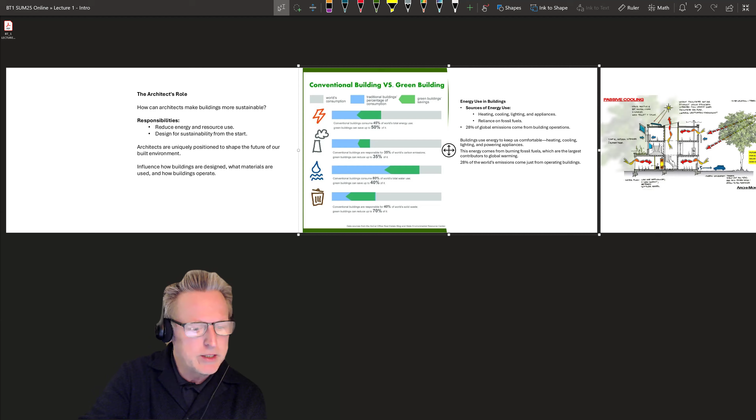With this final piece, we want to talk about some very basic steps that architects, interior architects, construction managers, and the whole building industry are taking to begin to remediate the CO2 output related to creating the built environment and making buildings more sustainable. I want to highlight that we're just brushing the surface of this topic. Next semester we'll go deeper into alternatives and additives instead of cement to create concrete, and we'll look at mass timber as a new construction material that didn't exist in any significant way 20 years ago. This is really just to introduce you to the idea that we are involved as an industry in CO2 output, that climate stability is important to our design, and that we have a role in mitigating our contribution to CO2 emissions and buildup.

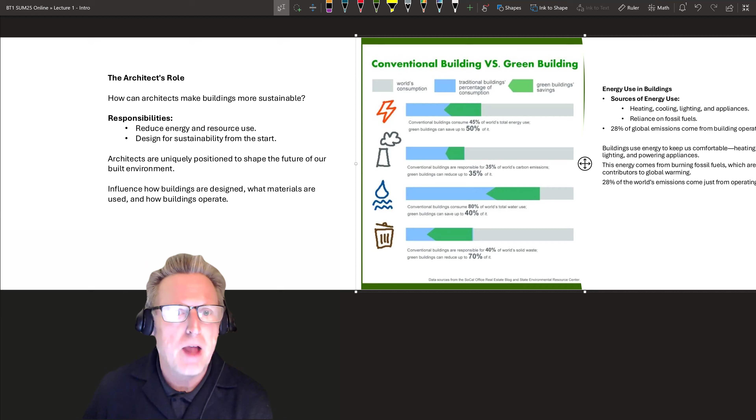And as usual, I have got my pen. I want to apologize if there are non-architects in the group here, since really I'm talking about the building industry at this point.

So what can the built industry do to make buildings more sustainable? There are really two responsibilities that we have taken on, and they're related, as a broad set of industries related to making the built environment.

First is simply to reduce the energy use and resource use of buildings. This can be done in very technical ways - special additives to concrete instead of cement, recycled steel, a whole host of different things. But that's mostly on the construction side.

But it really begins with the design process - the design of the building or its interiors has to be done in a way that thinks about sustainability, how it will use energy, how it will create comfortable interiors without significant active systems. Then as the design develops, what materials will you use to build it, what structural systems you'll use, and what mechanical and active systems will be needed to create that comfortable environment we want inside buildings.

As I mentioned in the last talk, the fact that the building industry contributes so significantly to CO2 carbon is also a remarkable opportunity for us to help the situation by reducing the amount of CO2 we produce as a series of industries. We're uniquely positioned to help shape the future in this regard, and we do that by influencing how buildings are designed, what materials are used, and how we operate buildings over their life.

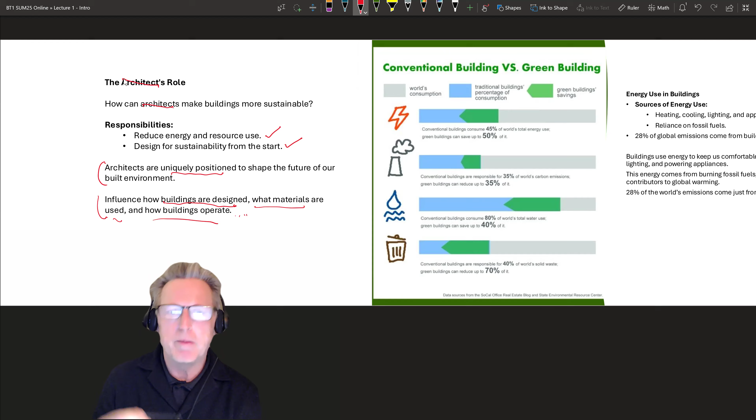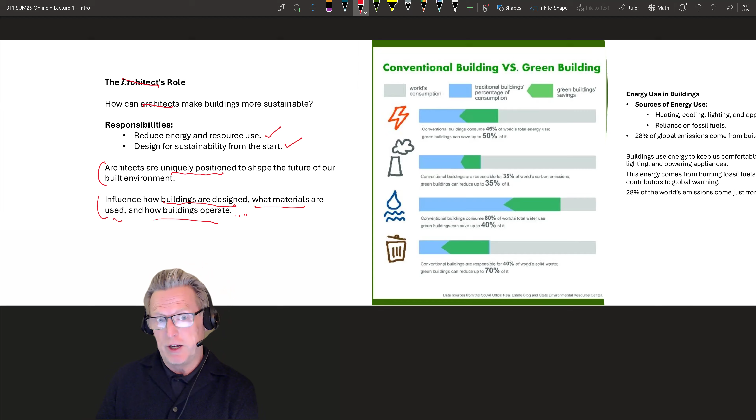I could add to that now how we reuse buildings, making sure they don't just end up in a landfill at the end of their useful life. If they can be reused, can we design them in a way to make sure they're reused, or that they can be disassembled so we can reuse the various pieces? Can we use materials that will endure, so that we can reuse them later?

If you simply look at conventional buildings versus what we call green buildings - sustainable buildings, net zero buildings, there's a whole slew of terms for it - you can begin to see that we can really reduce aspects of energy use, carbon emissions, water use, solid waste, all the problematic things about the built environment, simply by using particular design and construction strategies, nothing deeply innovative, that a conventional building would consume.

45% of the world's total energy. So we've kind of run through that, right? We can save up to 50% of that. And this is on a global scale we're talking about here.

We can reduce that by half if we were to implement sustainable strategies throughout the building industry and the built environment industries. That works its way down there. I won't go through each one of them.

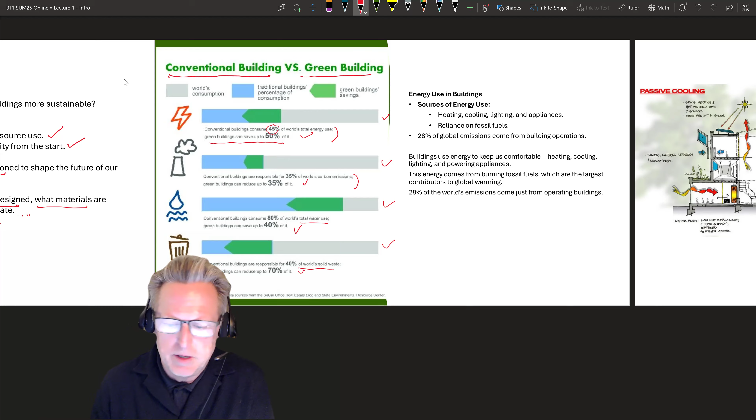So energy use, heating, cooling, lighting, appliances, equipment, all those types of things, we want to be conscious of that. Our reliance on fossil fuels, are there other alternative energy uses that are renewable? We've already kind of made that point earlier. Now this is just talking about building operations right now, not the construction of it, just the operations. So we're looking to cut that number down, is what it really comes down to.

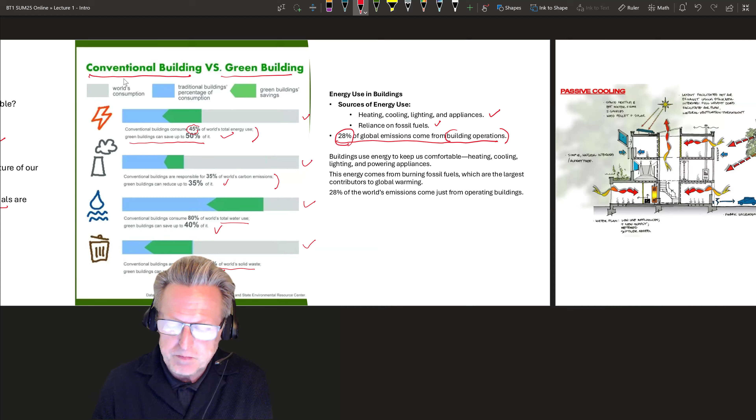I'm going to go through several large category strategies that we're using as industries, particularly on the design side, to address some of the issues we have. The first is passive design strategies: designing your building in a way that utilizes natural conditions of air movement, sunlight, and opportunities that plantings and trees give you for shade, to reduce the building's reliance on mechanical means, because mechanical means require energy.

The more we can create a comfortable interior without using energy from off-site, the more we reduce overall carbon input. Orient the building to maximize light if you're in a climatic zone where that's beneficial. The opposite would be the case if you're down in New Mexico, where you'd want to orient the building to reduce that, with small openings and thick walls.

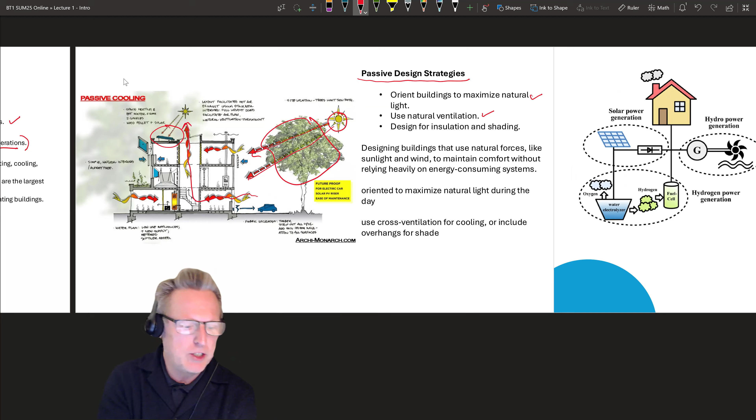But here you see other passive strategies, where you have a large deciduous tree blocking the sun. It will let sun in during the wintertime when it's colder and you want that solar gain. You see the air coming in, and as it warms, it moves up and escapes out in that direction, with a green roof starting there that creates extra insulation and a microclimate that helps cool things down.

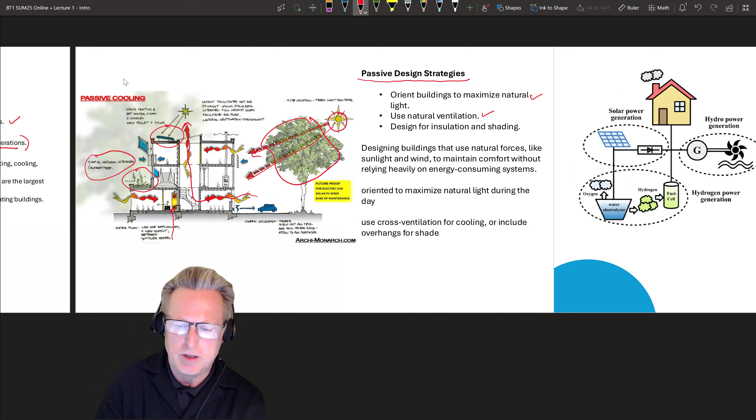There are other things noted here that aren't necessarily passive, like an energy efficient hot water heater and cooling system. The use of natural materials is another passive strategy as well. Those are some of the basic ones, but the key is passive design strategies, and you'll learn a lot more about them in Building Tech 3 and 4 and onward.

The next strategy is to use active systems, very energy efficient systems. We install mechanical systems, lighting, HVAC, all those types of things that don't consume as much energy as older technologies did. We also use renewable sources. Wind and sun are the primary types of renewable energy, and water can be renewable if it's recycled and reused.

But unlike wind and sun, water is not an infinite resource for us. There's only so much water on the planet, and only so much fresh, unsalted water. So that's something you have to work with internally and reuse water.

So we're looking to make buildings more energy efficient. They don't consume as much energy to do the same amount of work as before. LED lights are one of the main things. High performance insulation—you often see exterior walls getting thicker in a lot of areas because we need more insulation to meet the requirements of energy efficiency set by energy codes and things like that.

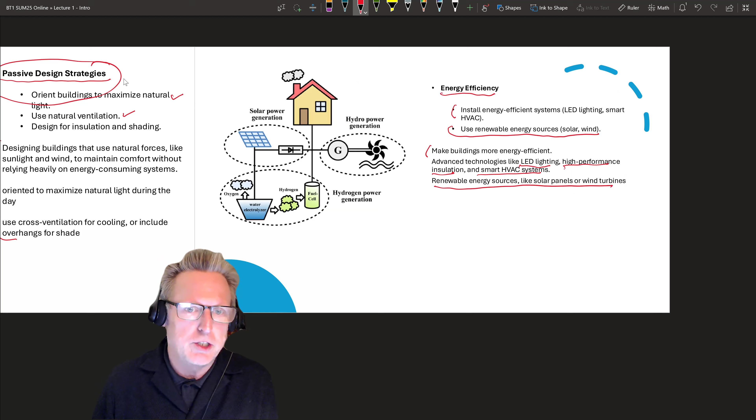And then, of course, as we've said, renewable energy sources is the thing too. Moving down as this kind of regenerates.

Another strategy is to use sustainable materials. So we've got passive systems, and when we have to use active systems, we're using efficient ones. And when we're selecting materials—this is materials from foundations all the way to doorknobs—we want to look at sustainable materials.

By sustainable, we can mean a lot of different things. There are many different ways for things to become sustainable. You can look at materials that are abundant and easily replaced and grown—bamboo as a wood is very easily sourced and ethically sourced. Using recycled material, like in steel—in the United States, we use a lot of recycled steel. Low carbon concrete replaces cement with other additives that create the concrete without loss of strength or durability.

But the other thing we'll look at is locally sourced materials. Keep in mind that the whole supply chain of materials contributes to CO2 emissions related to the built environment. So if I have to deliver steel from Japan or China to the United States, that transportation is a burden on the environment we need to consider. If we can source it internally through that recycled process—despite everyone's hopes, I don't think the steel industry is coming back in the United States. But it would be beneficial if it did, because then we wouldn't be paying significant money for that transportation.

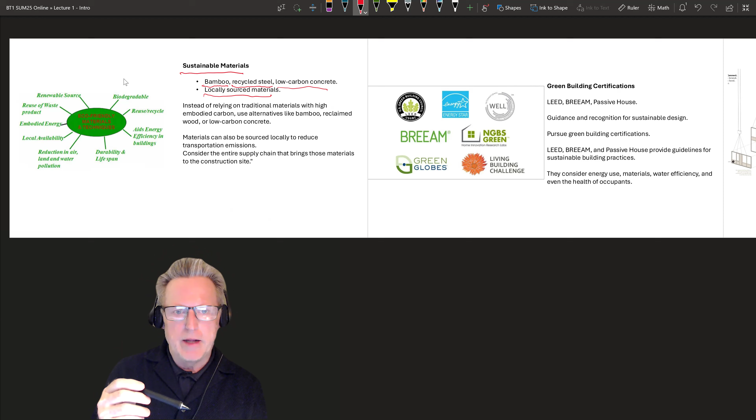So locally sourced material is important. One key piece is to think about the entire supply chain that brings the material to the construction site—not just the material itself and its overall use in the building, but what it costs to even get there.

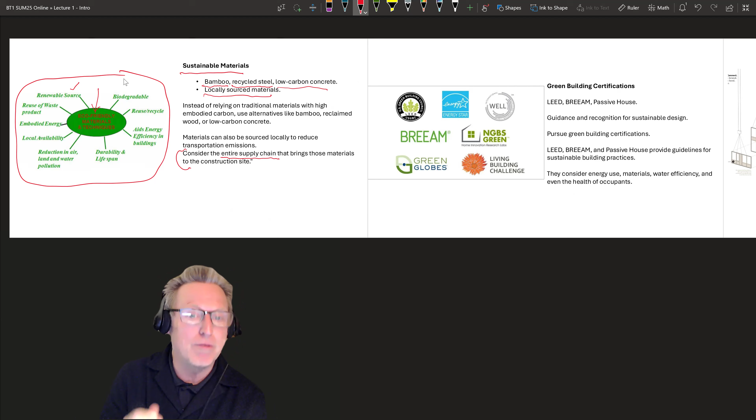This is a list of things that make what they'd call eco-friendly material and techniques. It has to be green, I guess, because that's what we picked to brand this effort. But materials that are easily renewable—like trees, for instance, if we're harvesting from a sustainable tree farm, that's great. If we're taking beautiful wood from the Amazon, that's not a renewable resource. That's not going to grow back in the next 100 years—it'll take centuries. It's not really renewable.

Reuse waste as much as possible. Use materials that are eventually biodegradable if the building gets demolished, or that can be reused and refitted. Again, recycle and reuse other things. Embodied energy is a bit more technical—we don't have to worry about that—but here's locally available, meaning you're not transporting it and paying all the environmental cost of that. Durability—things that last. Energy efficient equipment and things like that. And then we try to do it in a way that reduces air, land, and water pollution.

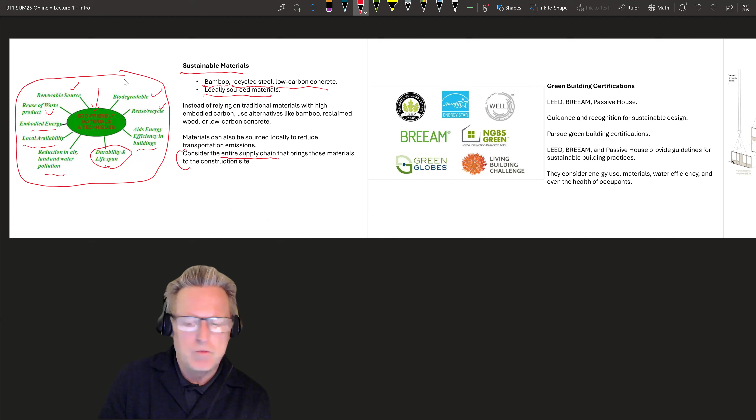So next, we've got passive solar, energy efficiency. Okay, stick with me.

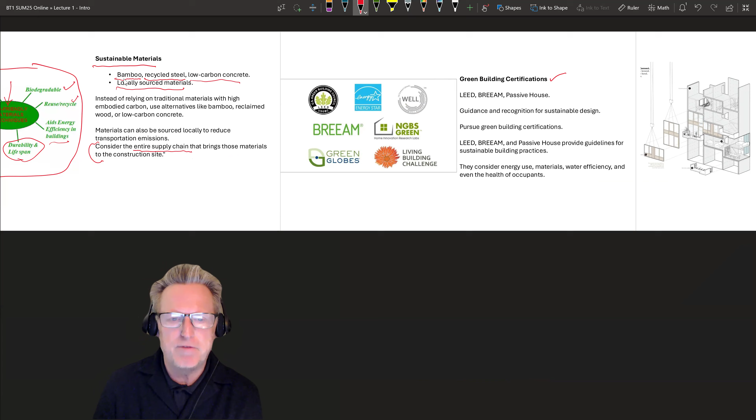Sustainable materials, there's sustainable sourcing also as related to that, and also to follow any number of guidelines that have been established for best practices in developing sustainable buildings. And there's a whole slew of them.

Energy Star is for appliances, to know that you're buying something efficient. Green building - the very architecture building you're studying in, half of it is certified as a LEED green building. And there's a whole slew of them. Each one provides guidance on how to meet certain standards, whether you go for their certification or not, to make sure your building is being designed and constructed in a way that remediates the building's impact on the environment.

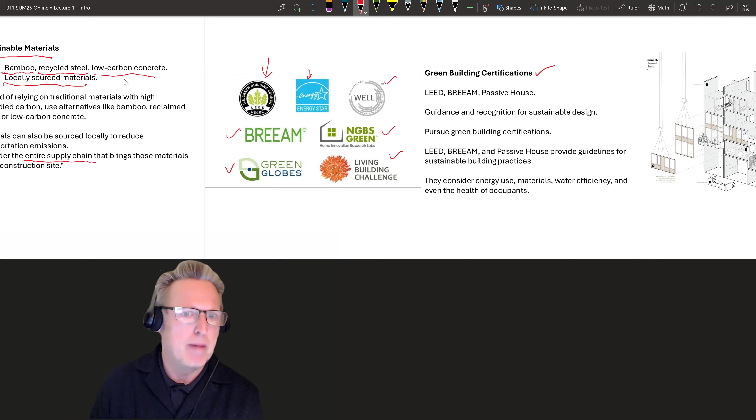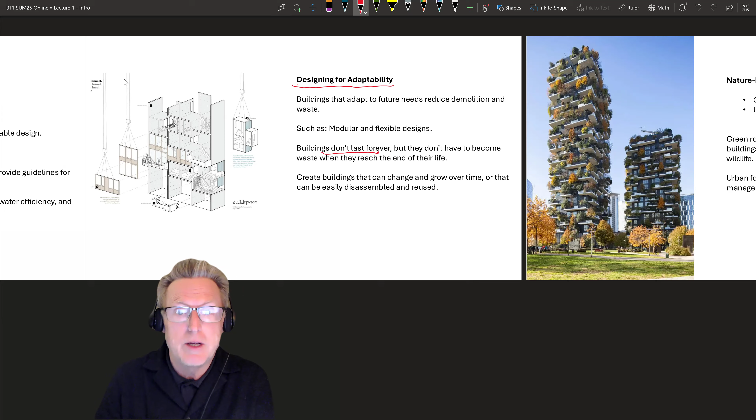Then there's some design things the industries are taking. First is to design for adaptability, essentially that the building can be changed and altered over time. So it's built either in a very flexible design or a modular design, so the building can have multiple uses over time. We know buildings don't last forever, but they don't have to go to waste when they reach the end of life. Can we take them apart and reuse them? Or can we simply take a piece away and add a new piece? That type of adaptability can help the building have a longer lifespan. Or if we don't need it, we can disassemble it and use it elsewhere.

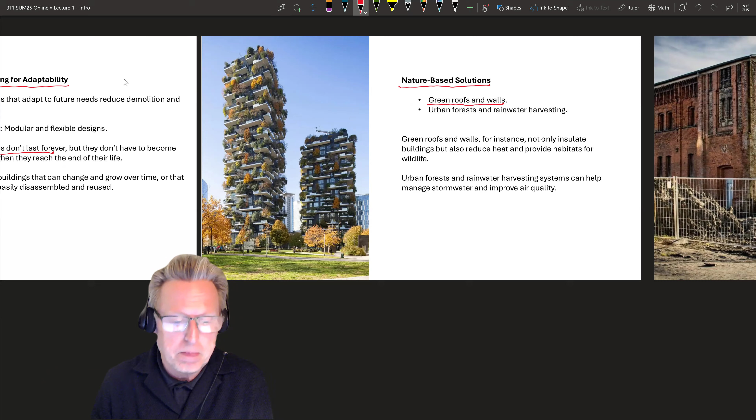Others are what's called nature-based solutions - another term for this is biophilic design. That's just a big term, I don't expect you to know it, you'll get to know it in a later class. But it's using nature within the building instead of just around the building to help it - it's part of the building, right? So green roofs, green walls, making large open spaces with trees, bushes, water within the building as a way of creating microclimates that help create comfortable interior environments - by creating shade, by creating areas with some humidity, and to take in carbon as a tree does and put out oxygen. So all those things really start to come into play when using those types of solutions.

And then the last is to engage in what we call the circular economy in architecture. This has to do with recycling and the reuse of buildings. Now, of course, we can design buildings that are flexible, but we have a lot of old buildings. So there's two things we can do that are much more preferable than simply tearing it down and putting it into the landfill: either find a way of reusing the building, renovating it, altering it for a new use, or dismantling it and reusing its parts.

I don't know if any of you were around while the Scranton Lace building was being renovated. As they did that, they really carefully took that building apart. They had piles of steel, they had a block full of bricks - all of that carefully stacked and organized because they were selling it, to be used elsewhere, right? So it's not just circular in terms of a building economy, but it's actually a monetary part of the economy. You can come to a building like this, and there's still value there.

Value either in its reuse, because already you have an enclosure, you have a structure, and that saves a lot of carbon already. The demolition of it would produce carbon, so by not demolishing, you're saving that. And then investing in it for its continued use also has positive cultural and community aspects - saving an old historic building, for instance, that has meaning to a community. So there's tremendous benefits to either trying to save the building, or if you can't, to disassemble it in a way that permits the reuse of its pieces.

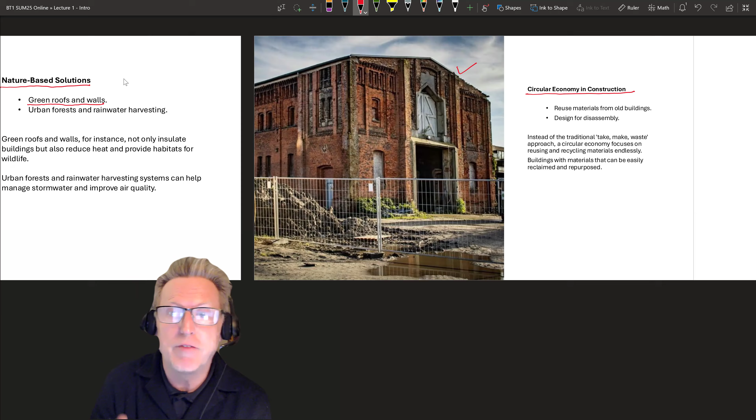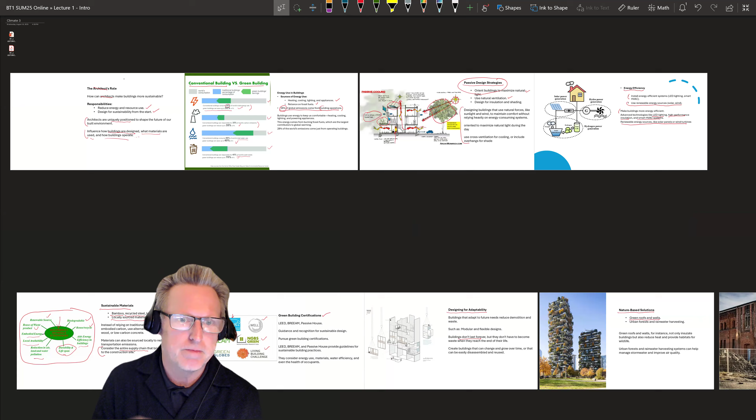And that's what we have for just a basic introduction to the building industry and climate - why climate's important to us, how it affects design, what the issues are in terms of climate change creating an unstable condition that's unpredictable for design, our contribution to that problem, and then lastly, the basic steps that we can take to begin to remediate this issue. Thanks again, and enjoy the rest of your summer.